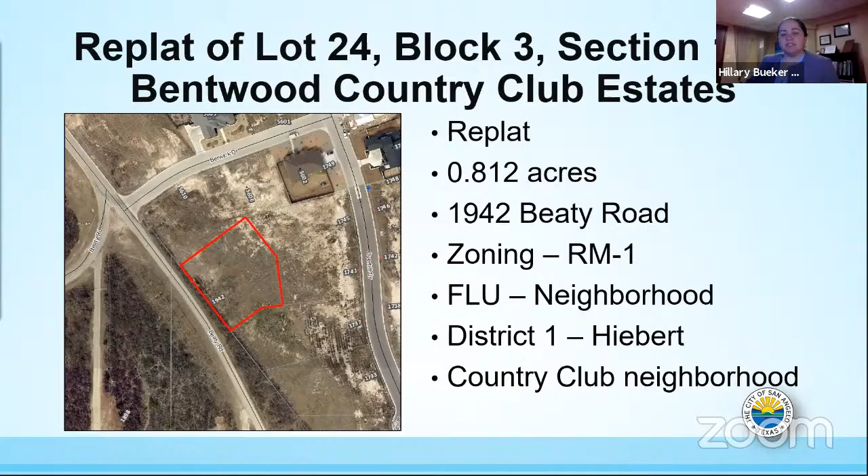So what they're doing is they're taking one existing lot that was platted in 2015 and they're splitting it up into 2. You can see the lot will remain fairly large. They're approximately 96 feet in width with 190-foot depth. So these are bigger than what would be required in RS1, but this is RM1 zoning.

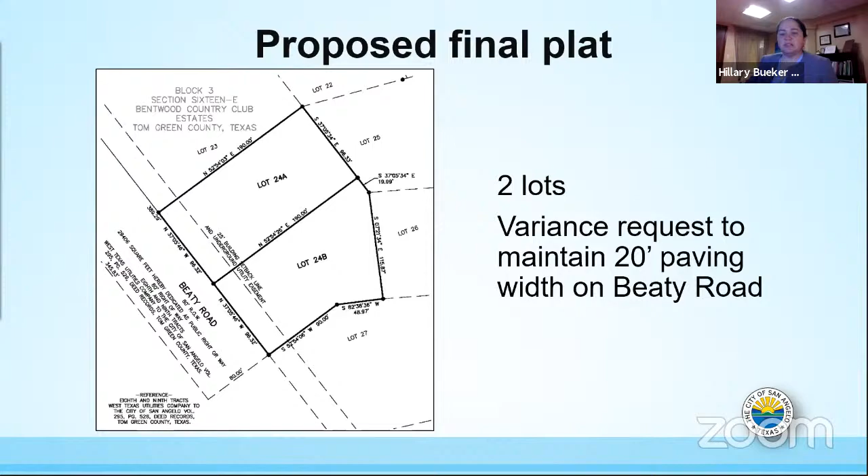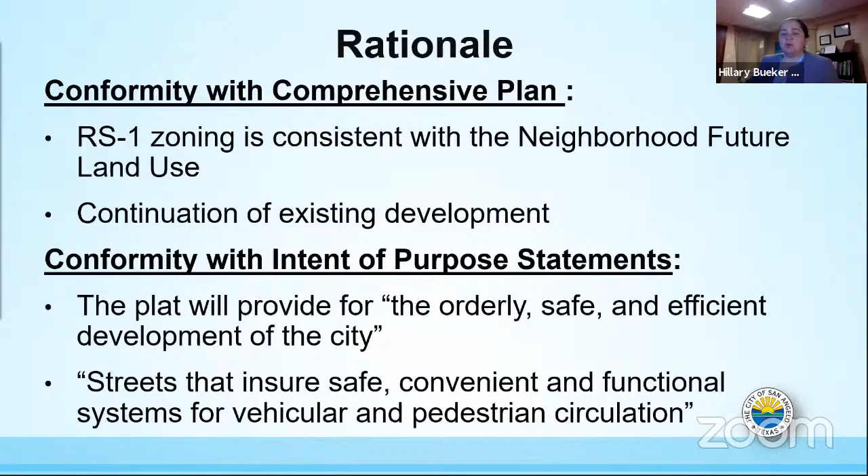So RM1 is consistent with the neighborhood future land use, and continuation of the existing development. So there's single family homes all in this area. This will provide for safe and orderly development of the city, and we will have a safe network of streets for vehicular circulation. So the one thing we do need to talk about is the Chapter 10 variance.

Beaty Road currently is just a circle at the end of this road. So this is a very limited group that will use this road. It's very rural in nature. This is getting towards the lake.

So when we looked at this street variance, we determined that it was not detrimental to leave it at its current width. Again, this is not a through street. This is not a street that the whole city uses; probably most people haven't even been in this part of Beaty Road.

So the current street meets the needs of the area, and adding 2 additional homes will not significantly increase that traffic. This street is currently on city property near a recreational area and maintains the same width adjacent to the east and the west. It is currently the same width.

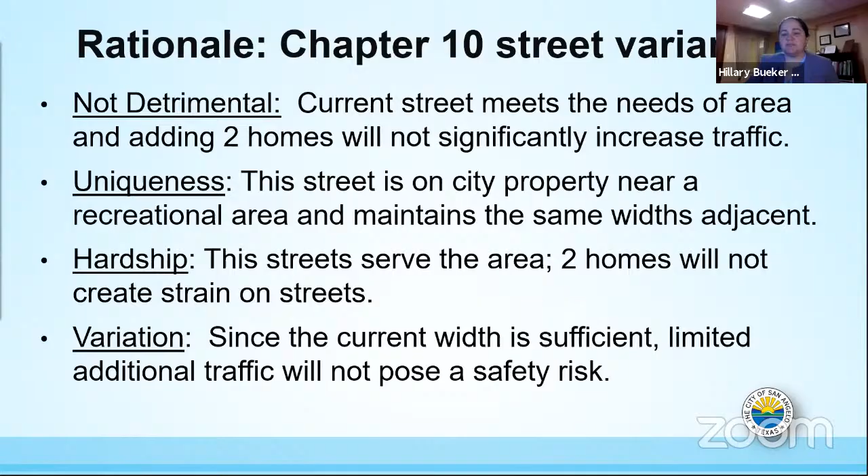The street will serve the area, and again, 2 homes will not create a strain on the street. Since the width is sufficient, this will not pose a safety risk. So this is looking at the street. You can see the Bentwood development to your left on this first picture.

The second picture is just the frontage of the lots, so it's a little hard to see what it will look like when it's done. It's pretty thick brush right along the road, but it easily can fit 2 cars passing each other. This is headed down towards the dam at Lake Nasworthy. It's a very rural and recreational area, so we believe this road is appropriate in this area.

Staff is recommending approval of a replat of Lot 24, Block 3, Section 16E, Bentwood Country Club Estates, and approval of a variance from Chapter 10-3A2 to maintain a 20-foot pavement width for Beaty Road, subject to 4 conditions. They will need a copy of their tax certification, and they will need to install water and sewer service lines to both new lots. They will illustrate an 80-foot right-of-way for Beaty Road.

The city will be joining in on this plat. The property that's adjacent is city property, so the city will be dedicating the right-of-way for Beaty Road in front of these lots. They will submit plans for Beaty Road, get a financial guarantee, or obtain this variance, as staff has recommended approval of. Does anyone have any questions?

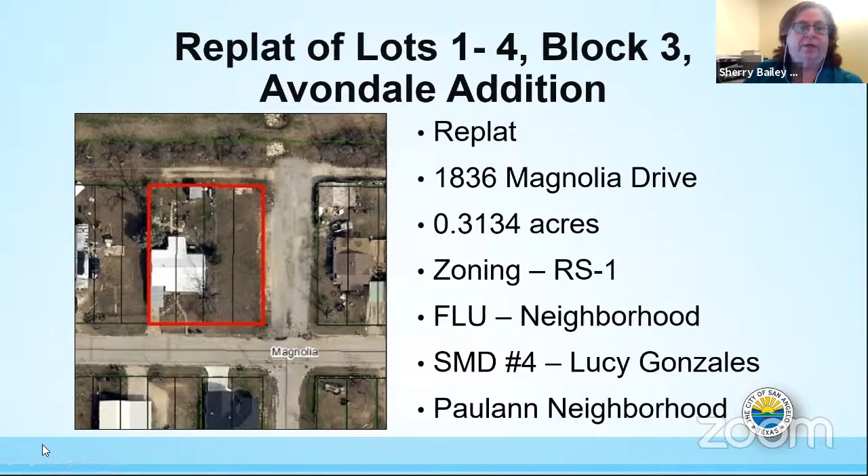As you can see, there are 2 lots, 2A and 1A. 2A is slightly larger so that it could accommodate the existing house and meet all of the setbacks. The second lot, 1A, presently does not have any structures on it.

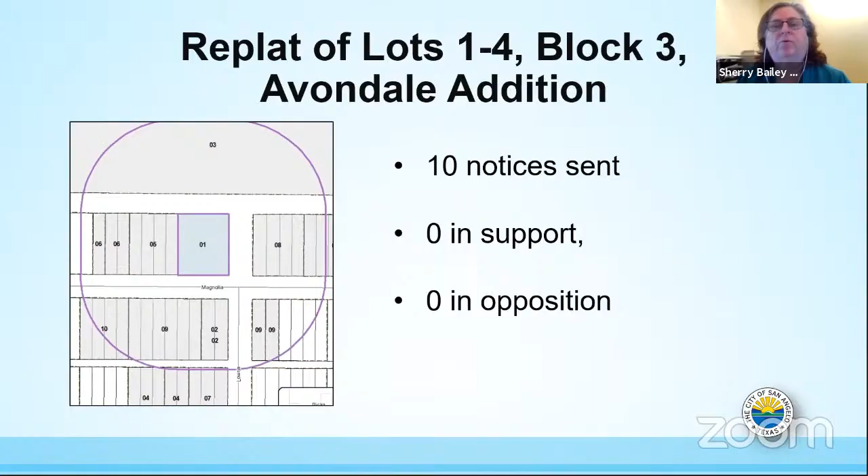The variance they are requesting is to maintain the existing 30 feet of pavement and curb and gutter along Magnolia. They are also requesting a variance to maintain the existing 36 feet of paving with no curb and gutter on Lowrie Avenue. Because this is a residential replat, we sent out 10 notices. We received 0 in support and 0 in opposition.

As you can see, this is from Magnolia Street, and there is the curb and gutter. Then if you move over to Lowrie Avenue, you can see that it is the larger 36 feet, but there is no curb and gutter, and the street has started to deteriorate around the edges.

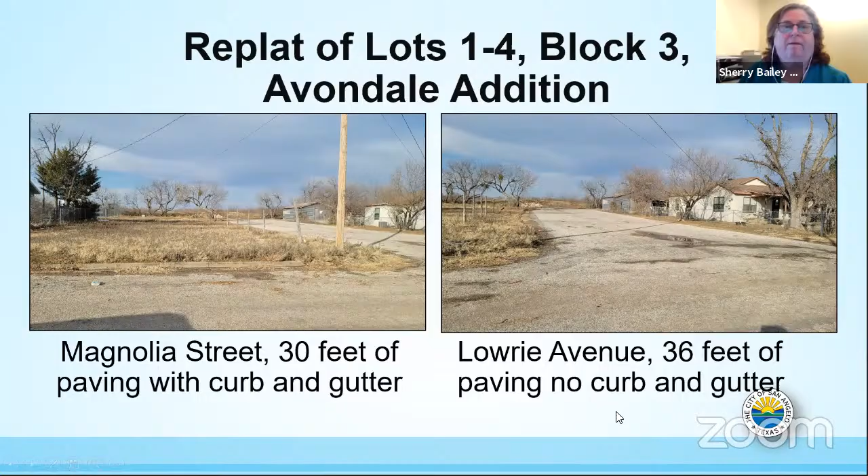This is in conformity with the comprehensive plan, since the plan has this in the neighborhood designation, and this is consistent with that. The purpose statements in this case are that the proposed plat will help provide orderly development and assist in future growth according to the city plans. It identifies boundaries and ensures easements and rights of way are provided.

Moving on to the rationale for the Chapter 10A variance request: staff is not supportive of the Lowrie Avenue variance because it is an existing road, and we agree with that, but it is only a 2-course paving that the city did a few years back. We believe it will continue to deteriorate over time, and it does not have curb and gutter, which would help that deterioration, even though the street only serves the 2 lots, the one on the corner to the west and then the one on the east.

This street really is no longer needed because it only serves those 2 lots, and the park is directly adjacent to that. There are no plans at this time to expand the street into the park. Staff believes an appropriate action would be to abandon the street and make it an alley connection. The water main service line goes through the middle, so we would maintain the 20 feet for an alley, but it doesn't make sense to continue this as a street.

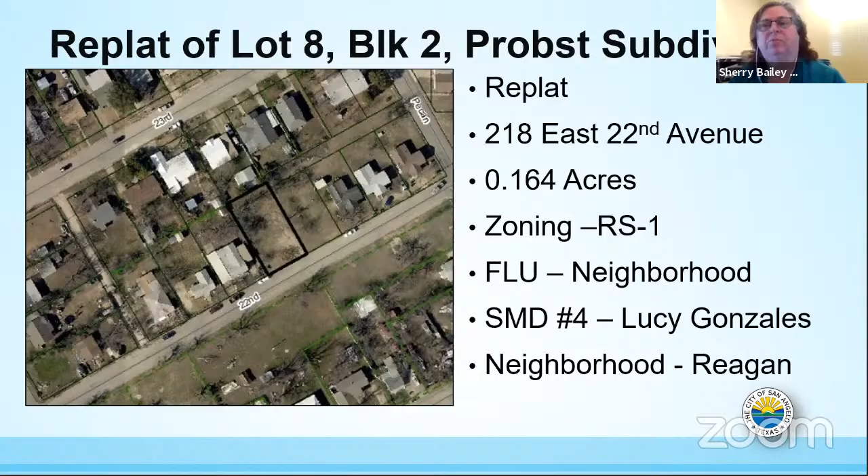Our next item on the agenda is the first replat of Lot 8, Block 2 of Probst Subdivision. A request for approval of a replat of Lot 8, Block 2, Section 2, Probst Subdivision, being 0.164 acres located at 218 East 22nd Street. Sherry Bailey, principal planner again. The piece of property we're talking about on East 22nd is actually this half of Lot 8. You can see Lot 8 originally touched both 23rd and 22nd Street. The address is 218 East 22nd Avenue. It is 0.164 acres. The zoning is RS1, single family. The future land use is neighborhood. It is also in Lucy Gonzales's single member district number 4, and the neighborhood is the Reagan neighborhood.

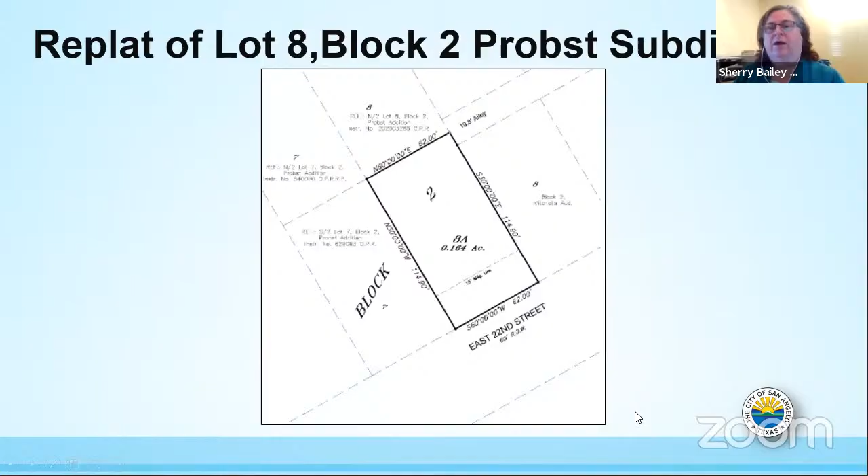This is a close-up of the proposed half lot. Even though it's never been divided off, it's always been used with a house on this property, and this piece of property left for development that just did not occur until the applicant made their request now. Because this is a residential replat, we sent out 26 notices. We received 0 in support and 0 in opposition. This will give you an idea of the area where it's located. You can see that East 22nd, when the street was built, it was built with curb and gutter, built to 30 feet of paving, but we'll talk about that in a second.

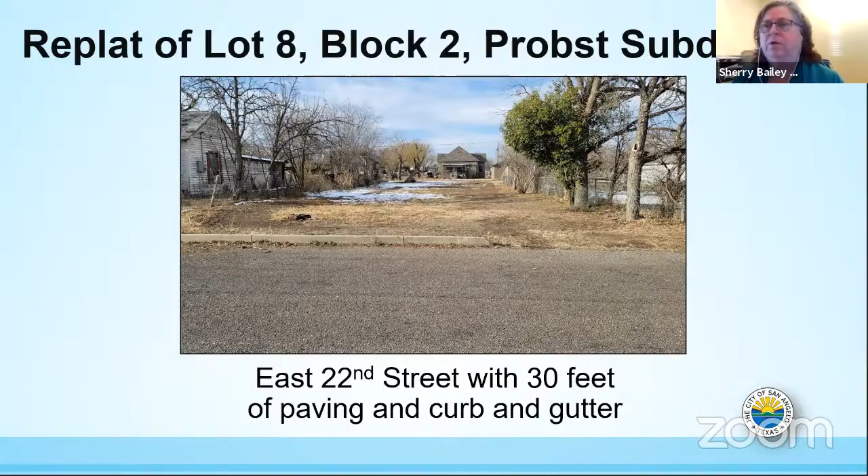It conforms with the comprehensive plan in that the comprehensive plan is neighborhood designation. Under the intent and purpose statements, the proposed plat helps to provide for the orderly development and assist in the future growth of the city. It also identifies boundaries and ensures easements and rights of way are provided.

When East 22nd Street was built, all of the required right-of-way for that street, or their incremental half, and the paving width was done on the north side of the street. I want to go back for just a minute, if I could.

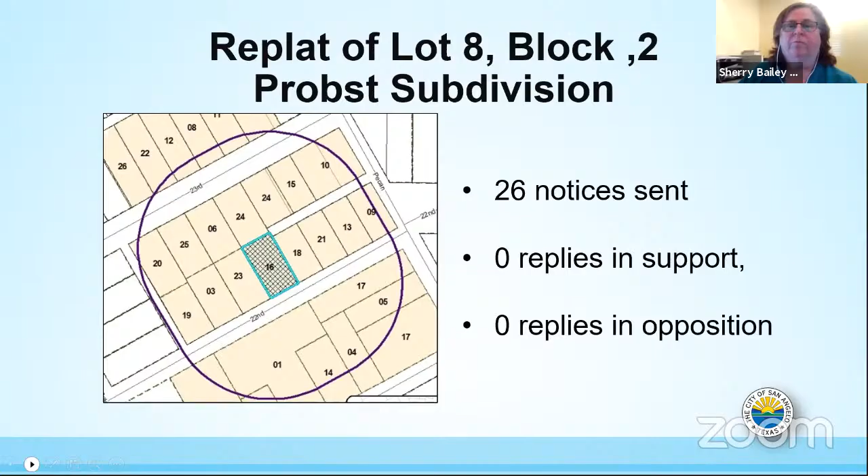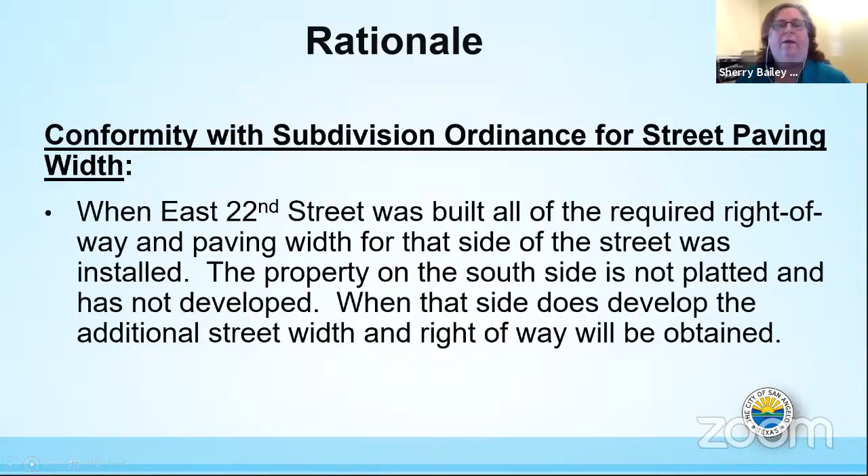You can see that the property here all along the south side is abstract. It's never been platted, and so it's never really been developed. So we've got what we need from the north side as far as right-of-way and street paving. When that south side does develop, we will look to get the increased right-of-way and the larger paving width, perhaps.

Staff is recommending approval of the plat of Lot 8, Block 2, Probst Subdivision, with 3 conditions of approval: that tax certification be provided prior to recordation, to install the necessary water and wastewater service line, and prior to plat recordation, submit revised plat or supporting documents illustrating the correct right-of-way for East 22nd Street.

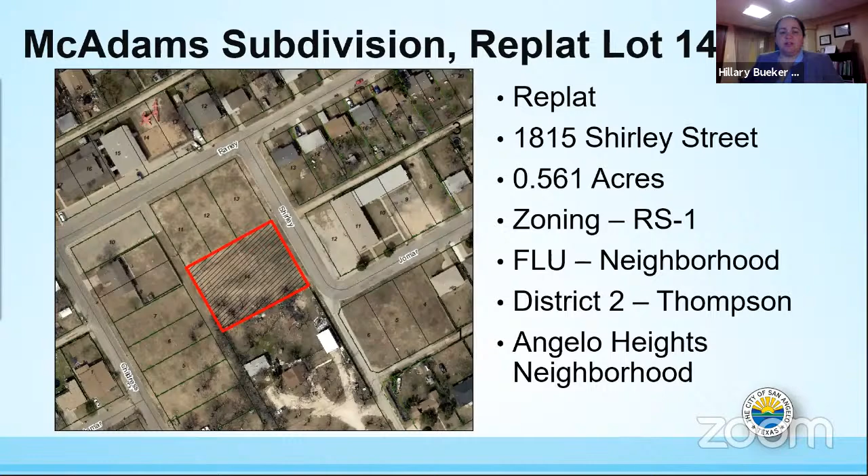If you just look around this area, you'll see a bunch of homes. The church is directly across, but there's a lot of infill in this area. So what they're looking to do is split this into 2 home lots, around 69-ish feet in width, with a 178-foot lot depth—a really good sized lot for this area. So it is 2 new residential lots.

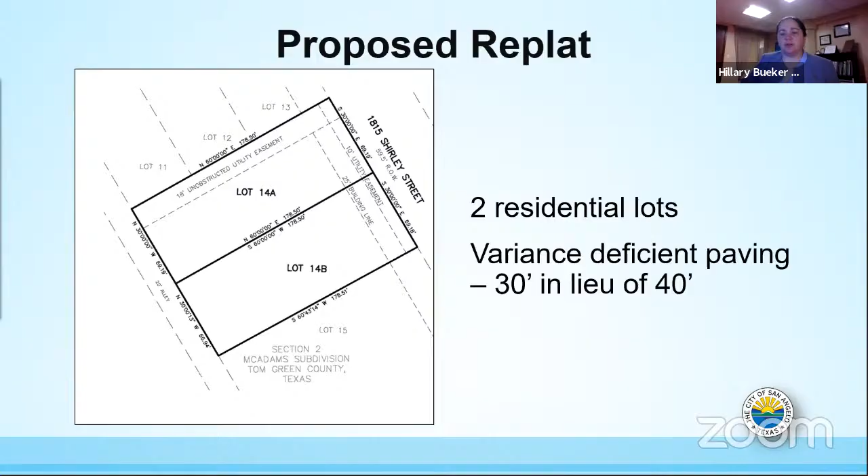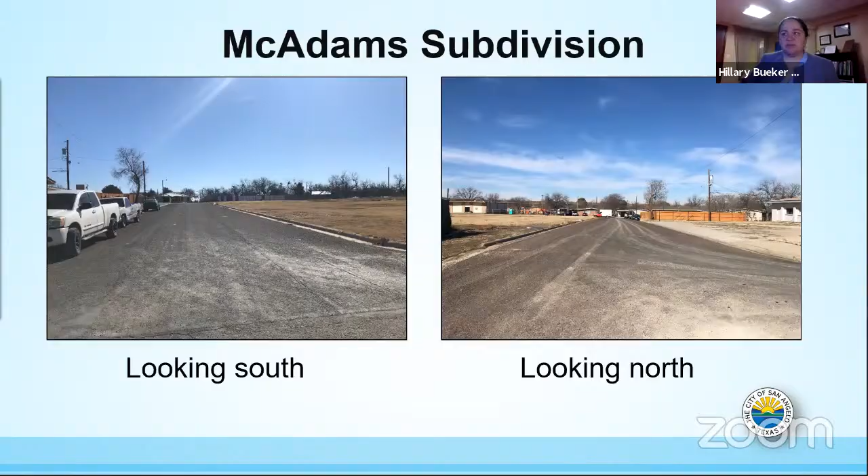So we are recommending approval of the plat. It is designated neighborhood, and this plat does conform with the comp plan. We also will provide orderly, safe development and have a street that will ensure safe and convenient functional access to this area. Again, this will not be detrimental.

Again, most of this area in this land is developed. It's a very short little street. The opposite side has been developed without improvements to this street, and again, it would be 140 feet of the 330—a very irregular jog. We don't see any physical conditions that would prevent it, but there is an existing curb, which helps the appearance and keeps it from deteriorating. And as we stated, the rest of the conditions are met.

This is the only thing they need to do. We think it's really an easy variance to support from a staff perspective. So staff recommends approval of a replat of Lot 14, Section 2 of the McAdams subdivision, and approval of a variance to maintain the 30 feet of paving with curb and gutter for Shirley Street, subject to 5 conditions.

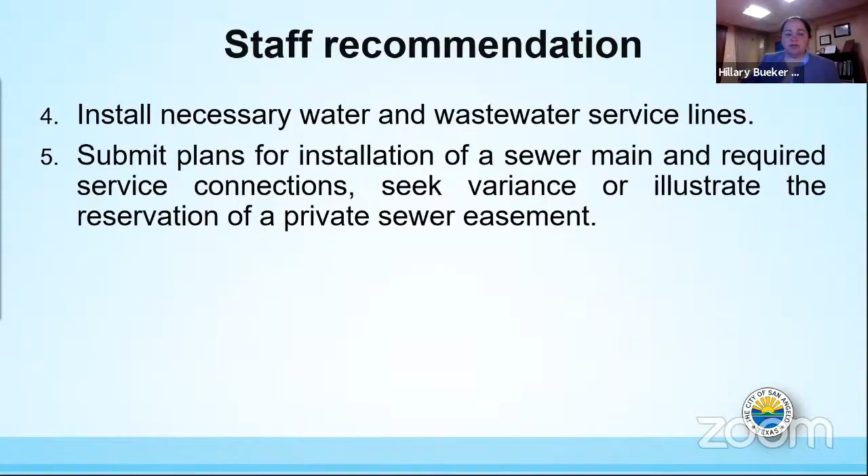Number 1, the tax certification. We need to correct the signature block on this plat, which is a fairly easy fix. They would have to improve Shirley Street or get the variance as presented. We would install the water and wastewater service lines to each lot. And then we have to do a little bit of a sewer main, or reserve a private easement, which I think is the applicant's intention. At this point, I'm going to stop sharing my screen—if anyone has any questions, I'd be glad to answer them.

Any questions for Hillary? Seeing none, we'll open it for public comment.

Erica, you're on mute. No, I'm not. Hello again. I just thank the staff for their help on this one and ask that you please approve as presented. Thank you.

Any other public comment? Seeing none, we'll close public comment and open up for discussion. I'll motion to approve as presented. Second. We have a motion and a second to approve as presented. All those in favor, raise your hand. Any opposed with the same sign? Okay, it's approved 6-0.

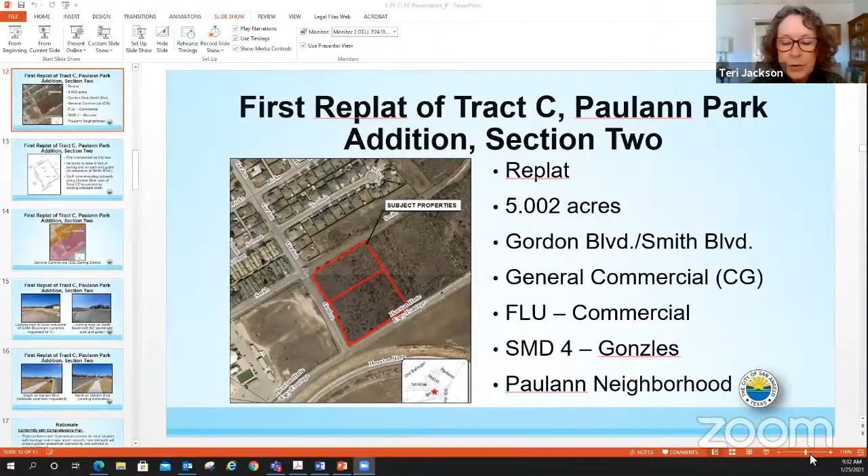Our next case is the first replat of Tract C, Paulann Park Addition, Section 2. A request for approval of a first replat of Tract C, Paulann Park Addition, Section 2, being 5.002 acres located at the northeast corner of Gordon Boulevard and East Houston Harte Expressway frontage road, and a variance from Chapter 10.3A2 of the Land Development and Subdivision Ordinance to maintain a paving width of 0 feet, no paving or curb and gutter, in lieu of the required 50-foot width with curb and gutter for Smith Boulevard and Urban Collector Street.

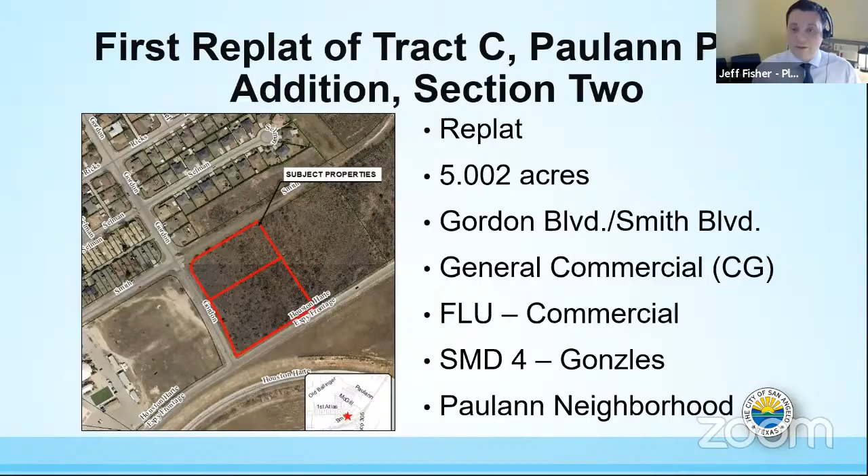Thank you, Vice Chair Jackson and Planning Commission. Jeff Fisher, Principal Planner. Our next case today is a first replat of Tract C, Paulann Park Addition, Section 2. Some of you may be familiar with this. A Dollar General went in last year; this was just over 5 acres. And now they want to sell the south lot. So it's basically one large lot, 5.002 acres, and they're going to replat into 2. The zoning is general commercial CG, future land use commercial, SMD number 4, Lucy Gonzalez in the Paulann neighborhood.

So this gives you an outline. Tract C1, Dollar General, is going to remain there. And then this next Tract C2 will be created off of the larger lot, and that'll be used for future commercial development. As part of the request, the applicant is requesting a variance from the subdivision ordinance to allow Smith Boulevard to be 0 feet, basically not to have to pave Smith Boulevard. We'll get into the variance criteria in a minute.

Staff is recommending the extension of the sidewalk down Gordon Boulevard. Dollar General, through their site plan, had already put in a sidewalk here and here. So that's a quick synopsis.

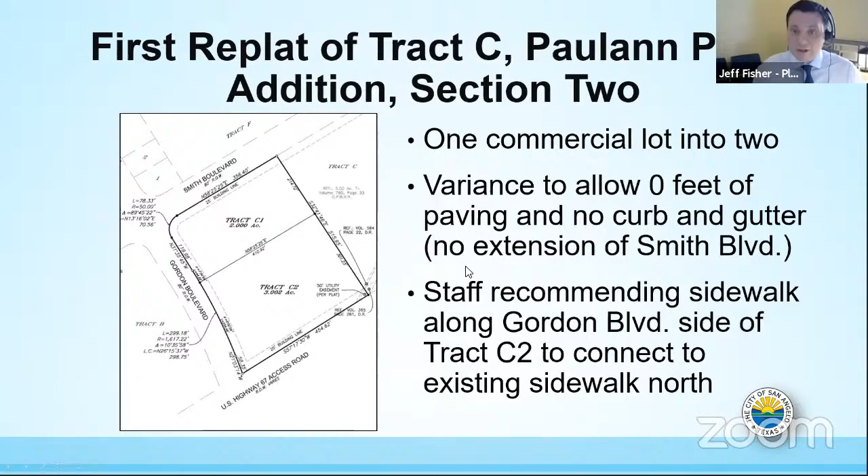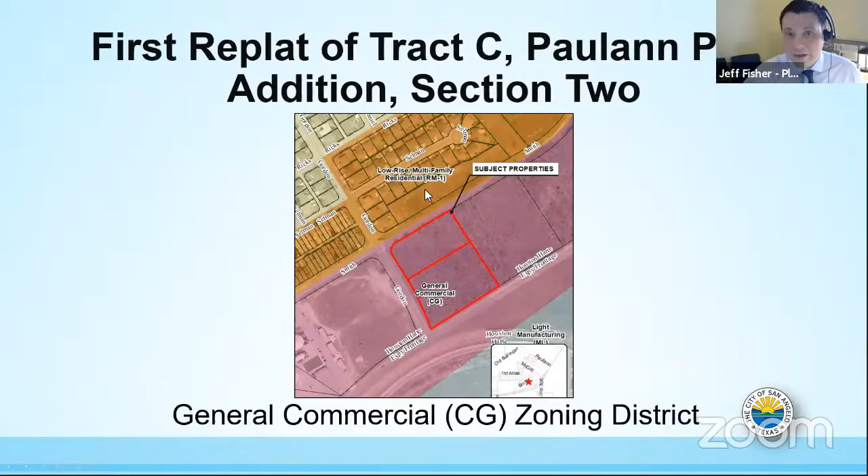Zoning, again, is general commercial CG. Pay attention to this map, we're going to go back over it in a few minutes. All of the area down here is currently vacant land, it's commercial. And then here as well, there's potential for development. This is low-rise multifamily, so that could allow single family, 2-family, or multifamily development in the future.

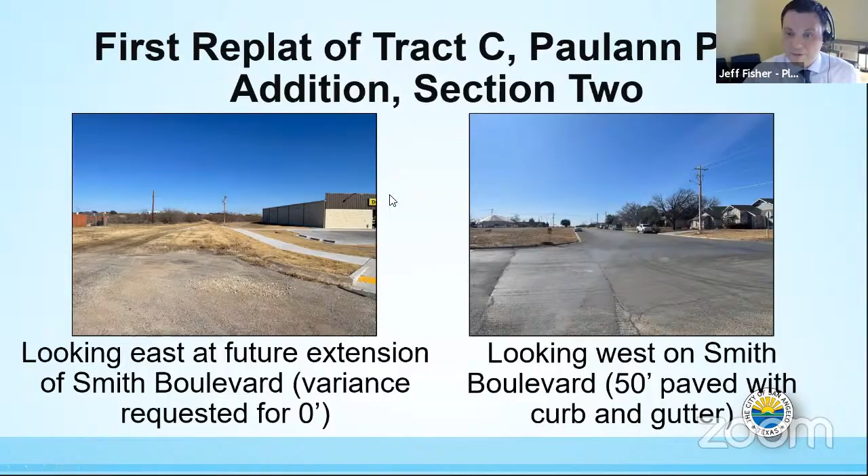In terms of the comprehensive plan and the intent and purpose statements, staff believes that it does conform just on the plat itself. The plat supports the commercial policies in that area. The zoning is CG, so that would allow future retail onto a major street network. If Smith is constructed, it would provide orderly development and assist in future growth with the city.

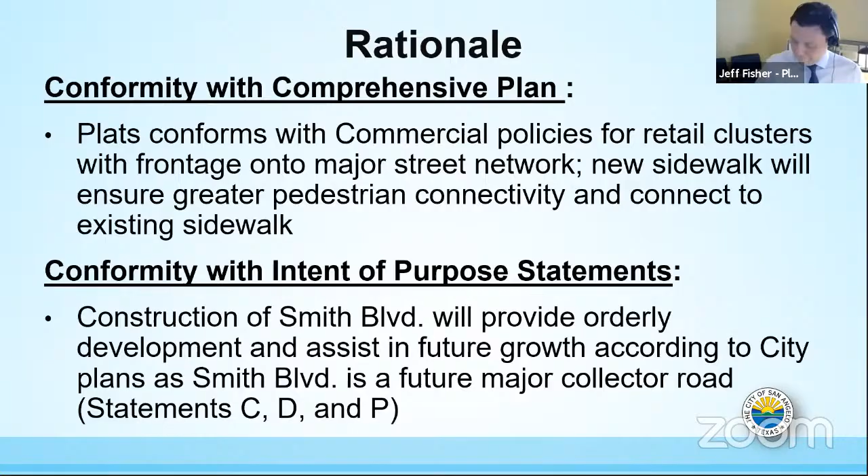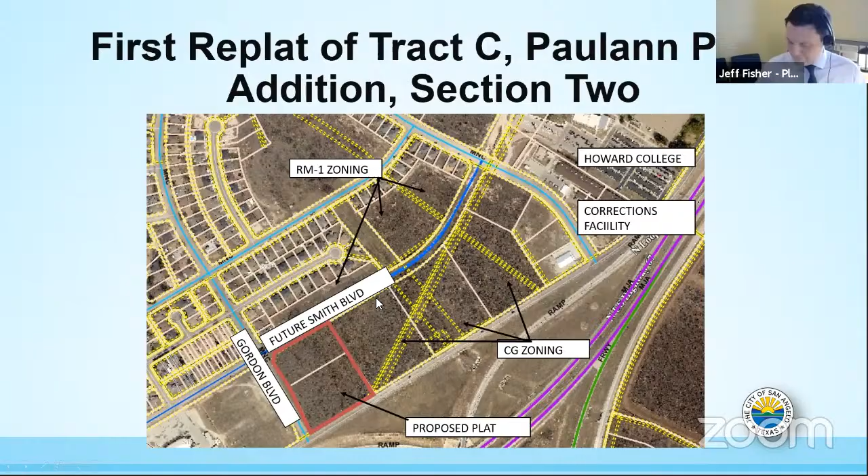So we're kind of left with a situation. If we give them the variance, we're going to have this huge gap in the street. So that's pretty much a summary of what I've stated. We believe it would be detrimental and set a negative precedent if we leave that hole in Smith Boulevard.

It's not a unique situation. Those other plats, like I say, were either platted before the current ordinance and therefore didn't have to do it, or they were left over with remainders, and we've now closed that part of the ordinance. So this is not a unique situation, and we believe that it would be prudent to get the 26 feet in this particular case.

Staff recommends approval of the first replat of Tract C, Paulann Park Addition Section 2, but denial of the variance from Chapter 10382 of the subdivision ordinance to maintain a paving width of 0 feet, no paving and curb and gutter, instead of the required 26 feet, subject to 6 conditions of approval.

So provide a copy of the tax certificate, prepare and submit plans for the required improvements to Smith Boulevard, financial guarantee or variance, submit a drainage study, submit plans and install a water main and service connections, submit plans and install a sewer main and service connections, install a water and wastewater service lines.

And then this was a fire comment. So because it's a dead end turnaround, it's only servicing no more than 2 lots. So the subdivision ordinance doesn't require it, but the fire code does prior to permitting. So this will be a note just to provide a width of a turnaround, work with the fire marshal's office.

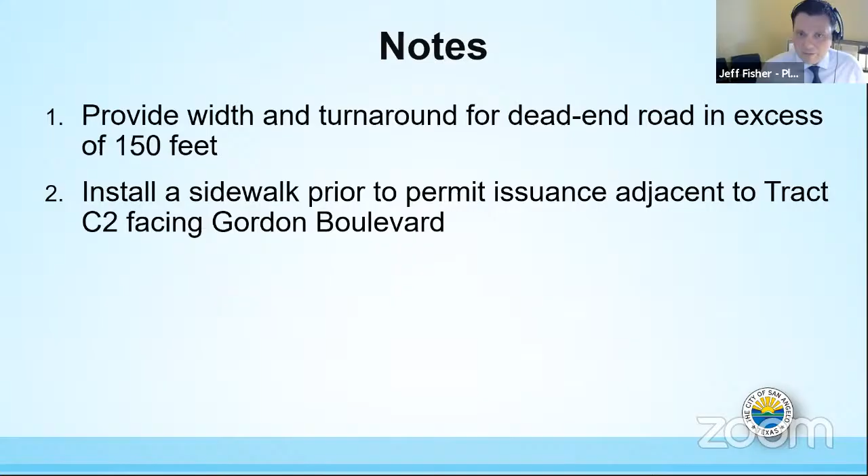And then the second comment we've discussed is the sidewalk. So this concludes staff's presentation. I will stop sharing my screen in a minute. And when probably Mr. Gully's here with SKG and city engineering, some of these conditions will probably go back through and look at some of the deferrals that were discussed. So I'm just going to stop sharing my screen now, and any questions or comments.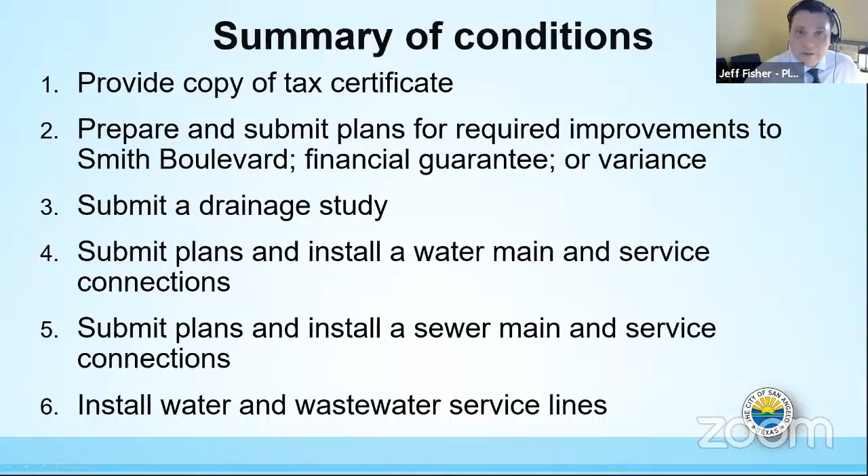Any questions for Jeff? Okay, seeing no questions, we'll open it for public comment.

Good morning, Russell with SKG Engineering. Thanks, Jeff, for your presentation. And I talked to Mr. Gatlin with engineering this morning. We're on the same page about the water and sewer utilities and potential main extensions. So really, we're not much there to discuss. We just wanted to leave it flexible enough such that we could work with engineering on whatever the solution is for sewer. There are several opportunities there. So engineering is gracious enough to work with us on the most effective solution for sewer.

And then really the main topic we'd like to speak of too is the widening, or really the paving of our incremental part of the street. As you can tell, looking at the site and even the pictures that Jeff presented, the dollar store there does not front the street that they're asking us to improve. We're creating this lot, doing the subdivision to create a lot that's really more at the corner of, has a frontage road. And so neither one of these two tracts has access, has entrances to, really relies upon that side street in any way, shape, form, or fashion.

The second one is Z 2021, West Loop 306, 1700 block—a request for approval of a rezoning from the single-family residential RS1 zoning district to the general commercial CG zoning district, being 9.182 acres out of Casper Berberich Survey 177, abstract number 52, lots 1, 2, and tract A, Lucky Lou Addition, located south of Loop 306, west of Old Stone Drive, and east of North Bentwood Drive.

I think the Planning Commission is very familiar with this piece of property. We recently told you that this triangle piece was being annexed into the city, and last month you had the plat for this piece of property. They are now moving forward with a comp plan amendment to transitional for the piece being annexed into the city. This piece of property, as I'll show you in a minute, is already transitional.

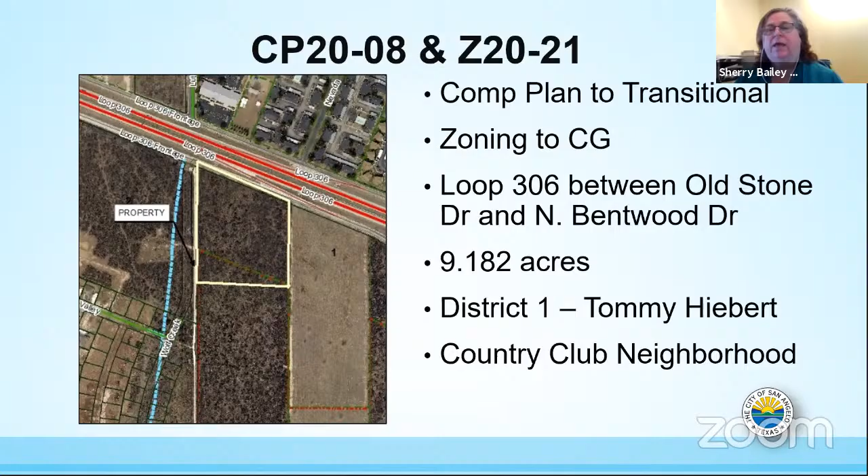And then they're requesting to rezone the entire area to general commercial. As you indicated, it's just off of the Loop 306 frontage road. Their total area is 9.182 acres. It's in District 1, Mr. Hiebert's district, and it's the Country Club neighborhood.

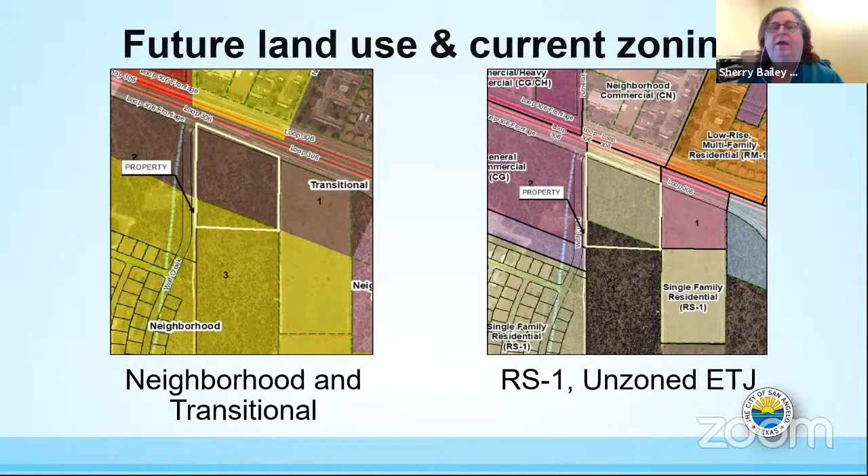This is the piece of property that we currently want to change the comprehensive plan on from neighborhood to transitional. As you can see, this whole piece already in the city limits is zoned RS1, and we're wanting to rezone the entire piece to general commercial. Bringing it at this point in time will sync up the annexation as it goes to city council for action with the rezoning, so that by the second hearing for both of those items, they will be annexed into the city and zoned at the same time.

There were 4 notices sent out. We have not received any in favor or any in opposition. The newly annexed area is intended to square off this area for commercial development. And because this is transitional, that's actually a really good comprehensive plan designation, because it buffers the area between Loop 306 and what we anticipate will be residential when they annex it to the south.

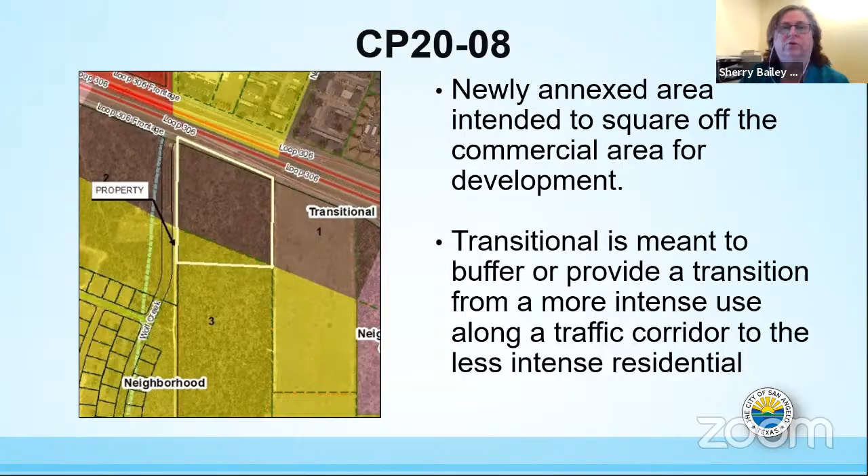And that transitional is exactly what it indicates - a transition from a more intense use to a less intense use, the residential use. So the rationale behind the zoning is that it's compatible with, if you approve the comprehensive plan amendment, the comp plan indication for a commercial area adjacent to 306 acting as a buffer to the residential. It's also consistent with the zoning ordinance.

If you look all around the city, you'll see a number of areas where a very intense use or a major traffic carrier is located, and general commercial is immediately adjacent to it, acting again as a buffer to the residential. It's compatible with the surrounding area. Old Stone, immediately to the east, is also zoned general commercial along the interstate. And the property to the west is low-rise multifamily, which is also considered a fairly high intensive use.

This area is beginning to develop, and with the sewer expansion capability project, we see that the area is going to take off, and we expect additional annexations and rezoning requests in the near future. We believe the effect on the natural environment will be minimal because it was always intended to be commercial use along that Loop 306, so most of the effect to the natural environment has already occurred.

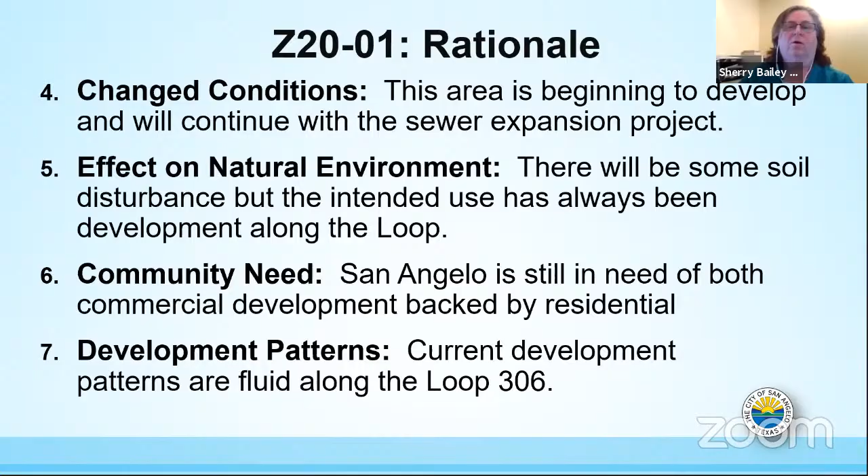As far as community need, San Angelo is still in need of both commercial development backed by residential, which provides a nice balance all around the city. The current development pattern is dictated by Loop 306 - you're very familiar with that. It carries most of the traffic from that south residential area into the community and other areas. So this general commercial is a really good mix along with the residential that we anticipate.

Staff is recommending approval of the request for the comprehensive plan for the 1.658 acres to transitional, and we're also recommending a rezoning for the entire area, the 9.182 acres, to general commercial. That just makes sense - it's immediately adjacent to the frontage road for 306, and it's consistent with what has occurred in the area. And with that, I'll stop sharing my screen. Are there any questions?

Okay, no questions for Ms. Bailey. We'll open it up for public comment. Seeing no public comment, we will open it for discussion.

I actually do have a question for either Sherry or Hillary. On this, we did it as one, we read it all together - do we need two separate motions on these since they are totally different items? No, ma'am, as long as the motion covers both items, we should be able to take one vote. Okay, great. Thank you.

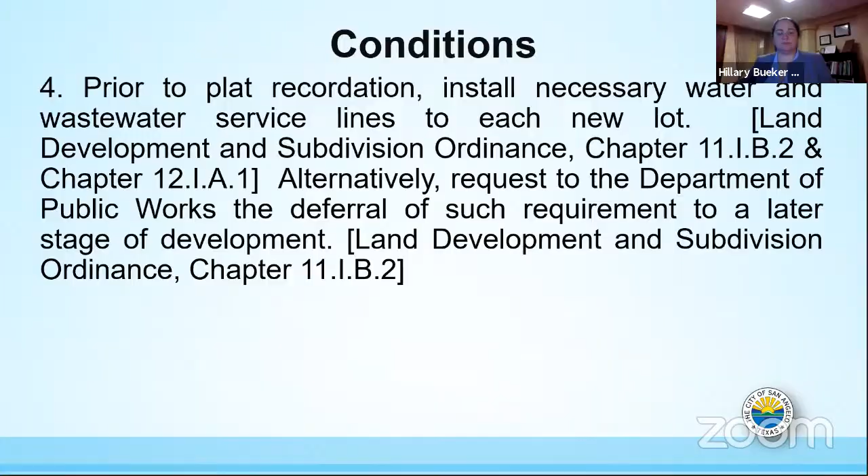So we are looking at Z 2022. This is 2 North Koenigheim Street and the surrounding properties. We are rezoning from 4 different districts: CGCH, general commercial heavy commercial; CN, neighborhood commercial; RM1, low-rise multifamily; and CG, general commercial, all to CBD. When we pull up the zoning map here in a minute, you'll see that the CBD is directly adjacent to this.

The applicant for this request is Jack's Convenience Store. They own the adjacent property, which is their lube center. There is a law office in this area, and the rest is the Tom Green County Sheriff's Office and yard. Jack's was the applicant, so both of their properties are included. We've spoken with Tom Green County and they have agreed to be part of this. We have not directly spoken to the law office, but we sent them a certified letter, and they've received their notification.

So we've sent out 2 letters and have heard no opposition. Again, 2 North Koenigheim and most of the adjoining block, we're looking at a little over 3 acres. This is SMD number 3, Harry Thomas's district, in the downtown neighborhood.

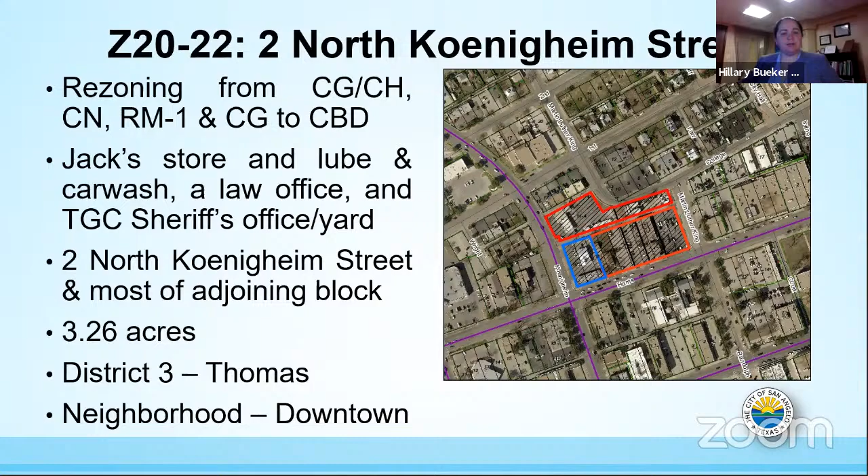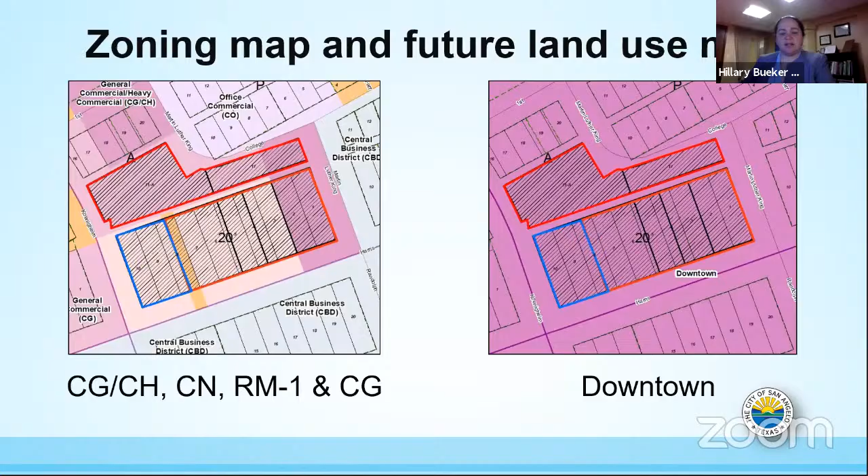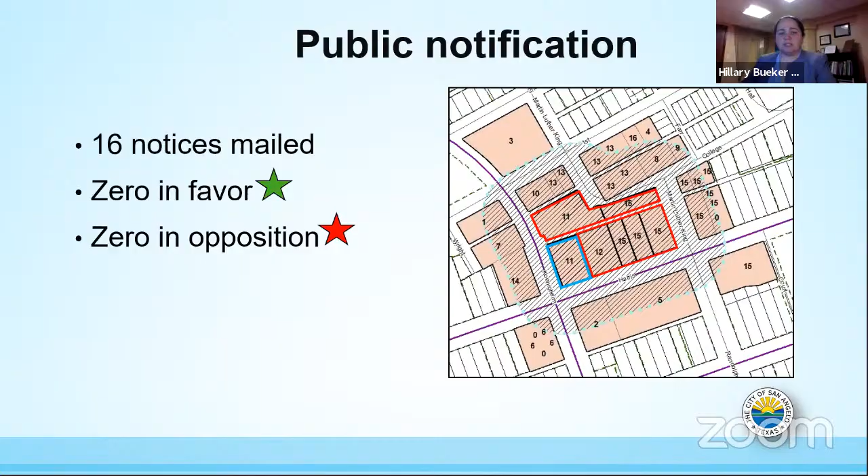So we mailed out 16 notifications. We've heard 0 in favor and 0 in opposition. We believe this is compatible. Again, the future land use calls for this area to be downtown. We want to reinforce the downtown as a commercial service center, which most of these uses would fall in.

This will allow for a greater variety of uses, and it will allow the commercial uses to expand at their current locations. Again, we have a higher allowance of freestanding signs. This was originally initiated by the applicant because they are looking to install a 40-foot sign, and the current CN zoning did not allow it. So this will allow up to 40-foot signage.

Again, it's compatible with all the surrounding properties. The area is mostly comprised of mixed uses, but this specifically is commercial. This would allow some residential and allow for mixed use. We have talked about rezoning most of these properties on and off for a while, so this will be compatible with the conditions as they've changed over time.

And the CBD standards really allow the flexibility for these properties in freestanding signs, in setbacks, in parking issues. We see little to no adverse impacts on the development. These sites are mostly developed as they stand today. And again, allowing CBD to expand will expand the development opportunities in this area. This is mostly mixed commercial. There are some residentials around this area, but the subject properties are strictly commercial.

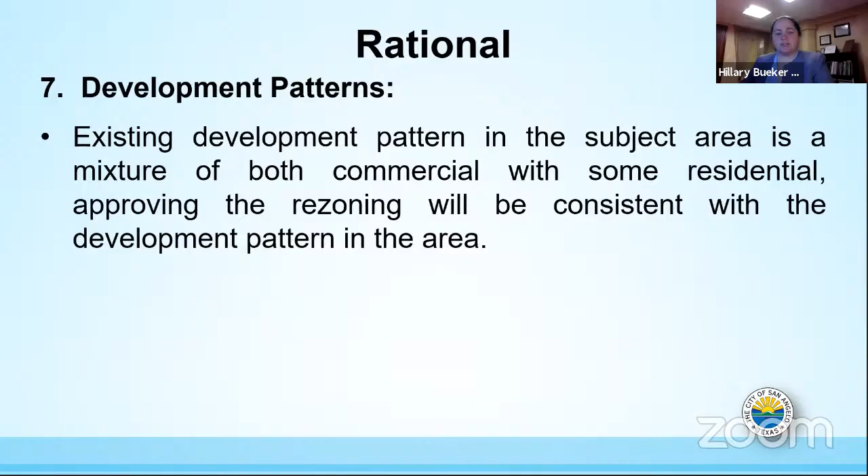So staff is recommending approval of the rezoning from the neighborhood commercial, general commercial, heavy commercial, and low-rise multifamily to the central business district, being 0.5 acres located at 2 North Koenigheim and 2.72 acres west of Martin Luther King, north of West Harris, and south of West College Avenue. Does anyone have any questions?

Okay, no questions for Ms. Hillary. We will open it up for public comment.

Seeing no public comment, we will open it up to the commission for discussion. Make a motion to approve.

Second. Okay, we have a motion and a second. All those in favor, raise your hand. Okay, any opposed?

Brittany, you're voting for, is that correct? You're muted, Brittany. Yeah, I'm sorry, I'm voting to approve. I apologize, I lost my connection. Okay, that's okay, thank you. I just wanted to confirm.

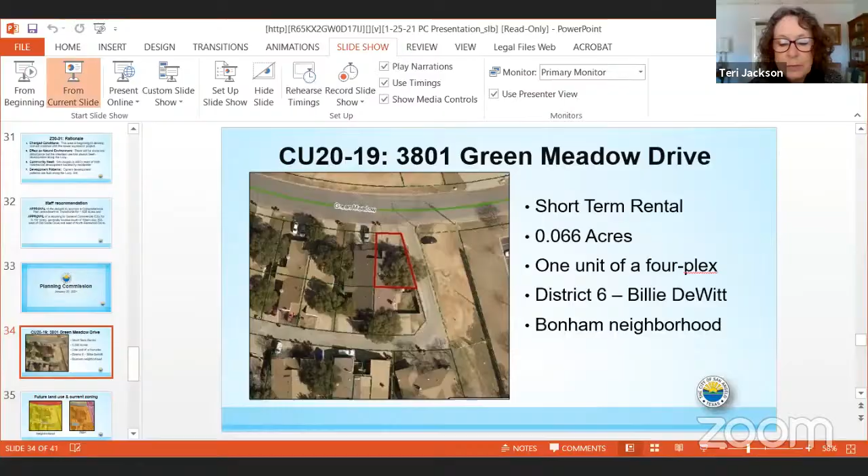CU 20-19, 3801 Green Meadow Drive, a request for approval of a conditional use for a short-term rental within an existing residential structure in the low-rise multifamily RM1 zoning district for a property located at 3801 Green Meadow Drive.

Thank you, Vice Chair. This is a request for a short-term rental, and as you're well aware, short-term rental takes a conditional use action. In this particular case, it is a fourplex. Each portion of the fourplex is individually owned.

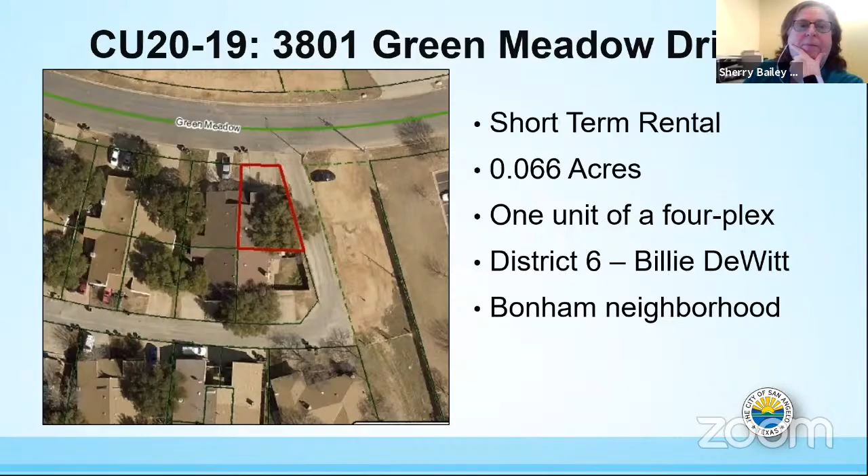So it's not a multifamily in the traditional sense, but it is individually owned. It is 0.066 acres, in District 6, Billie DeWitt's district, and it's the Bonham neighborhood. The future land use is neighborhood, it is consistent with that, and the zoning is RM1.

There were 22 notices mailed out very late on Friday afternoon. We did receive 2 letters of opposition. Both had the same concerns. The entire area out there is RM1, and there are a lot of individual units that were purchased and are now being rented out, so it is a very intense residential use, with a lot of cars out there.

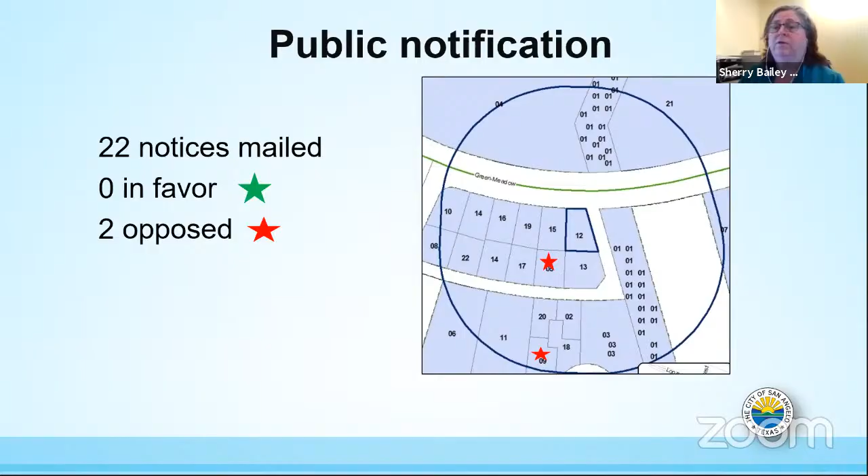The rationale for supporting the conditional use in this case is because the impacts are minimal on that corner piece of property. The parking is provided, the fencing is provided, all of the requirements under the short-term rental ordinance are there. It is consistent with the RM zoning, and the short-term rental does fit in as a conditional use under that zoning. It is compatible with the surrounding area because all of the development in that area is fourplexes, and it's more intensely developed as a residential area.

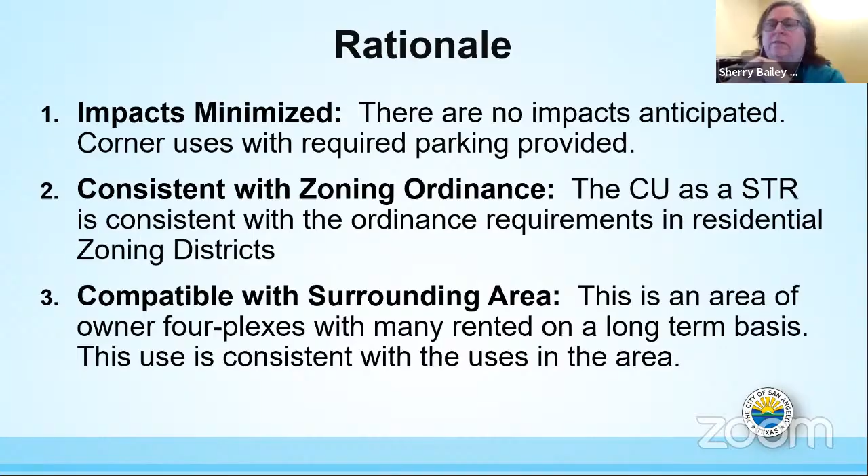We do not anticipate any effects on the natural environment. As for community need, short-term rentals are very similar to housing, but on a very, very short-term basis. We get a lot of demand within the city for people coming in to the base who are going to be here for 2 weeks or so, looking for someplace they can rent. They don't want to go into an apartment situation, and most places can't, so there really is a large call for that.

In visiting with some of the people in the area, we know that some of the businesses out there have people coming in. This request involves no changes to the existing development pattern because it's already an established use, and it's not impacting that use from a staff standpoint.

Staff is recommending approval of the conditional use for the short-term rental at 3801 Green Meadow Drive with 2 conditions of approval: that there's no exterior evidence of the short-term rental status, and that the property owner shall maintain the short-term rental operation consistent with section 406 of the zoning ordinance, adhering to all requirements. In visiting with the applicant, they have a couple of other short-term rentals and are very aware that if they don't maintain it or follow the requirements, staff will know about it very quickly.

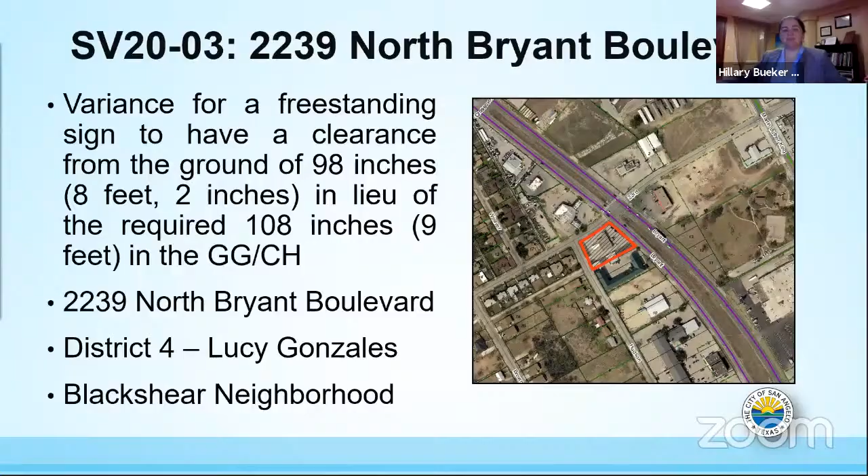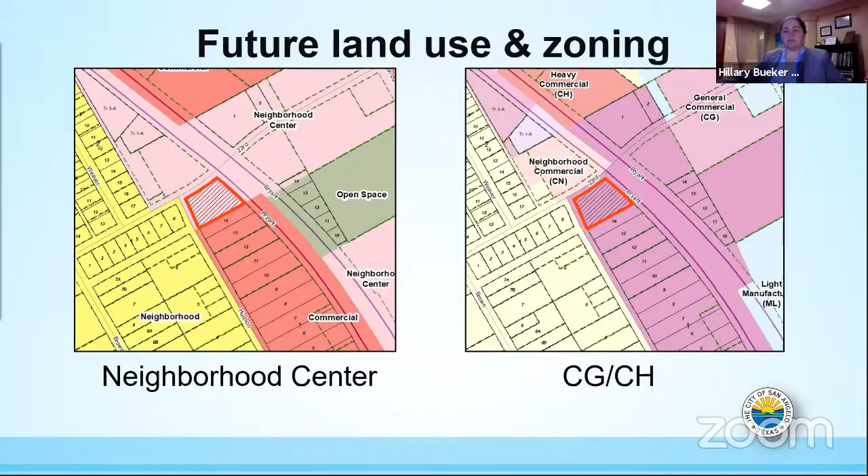Okay, here we go, Planning Commission, I've got the last 2. This is a sign variance - Terry just mentioned they are requesting a variance. They are going to be at 8 feet 2 inches instead of the required 9 feet. They are located at 2239 North Bryant in SMD number 4, Lucy Gonzales's neighborhood district, in the Blackshear neighborhood. So the current zoning is general commercial, heavy commercial, but the future land use speaks to a neighborhood center kind of feel, so we want to keep it relatively low scale if we can.

This is the proposed sign. You can see the existing sign, the Concho Educator sign - the 2 poles exist today. They have a digital sign that they moved from a different location and would like to place underneath the existing sign, which gives them that clearance that doesn't meet the 9 foot standard. The drawing to the right illustrates where the sign is located - it's interior to their lot. A lot of the 9 feet requirement is to allow visibility of pedestrians and vehicles. Since this sign is so close to the building, I don't think visibility is as much an issue as it would have been had this sign been located along the right of way.

So they have actually installed it. We have talked to them - it needs to go to Planning Commission. You guys can make a decision, and then they might have to remove it or move it up depending on your final decision. But you can see there, even a car parked beside it - the truck has a little bit of visibility issues, but the SUV can see underneath it. So that's really what we're speaking to. If your variance is granted, we would require them to push it up all the way so it touches the other sign, giving the maximum amount of clearance under the sign.

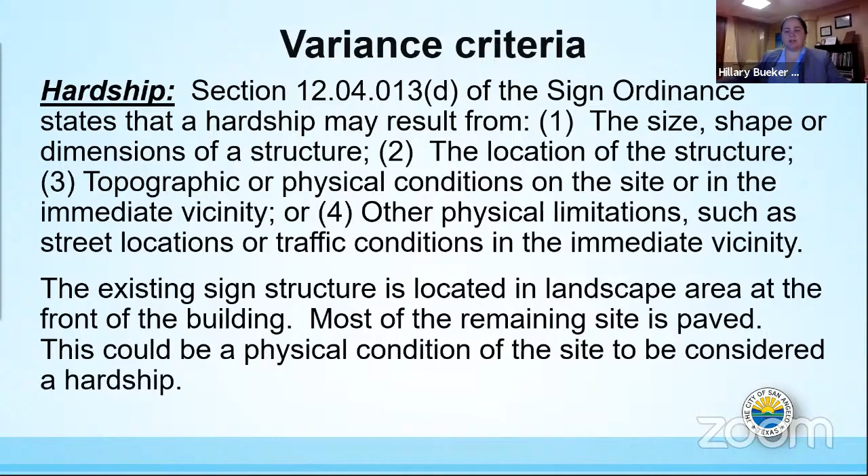So again, a hardship is required for a variance. The existing sign structure is located in a landscape area in front of the building; most of the remaining site is paved. So this physical condition might be considered a hardship - that's really for the board to decide. If they had to move it somewhere, that might be a pretty big deal trying to find a location given the parking lot exists today. So staff is recommending approval of this variance. The proposed sign will not impede traffic patterns or safety. The existing sign has been located in front of the building for years, and the digital sign will just be an addition to this existing sign.

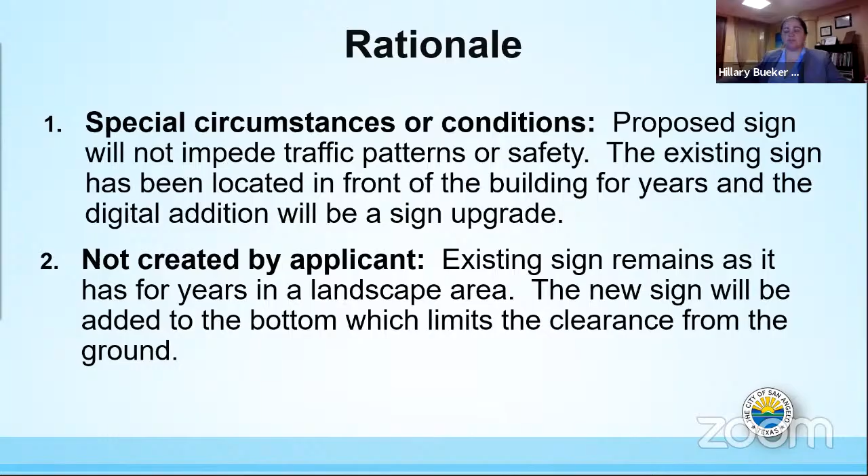Putting the new sign at the bottom will limit the clearance, but we believe 8 feet 2 inches will serve since it is in a location very close to the building as it sits today. The sign ordinance set the 9 feet requirement so that there would be no major impacts to traffic, given its interior location on the property and the fact that it's set back 63 feet from the street curb.

Staff doesn't foresee any traffic or safety concerns at this point. With the approved variance, the sign will meet all other provisions of the sign ordinance. Since this is mostly for vehicle visibility, we think the sign's location should not cause these issues. The proposed sign will not depart from the ordinance other than the ground clearance requirement, so if we leave it in the same spot, this will just be an extension of the existing sign.

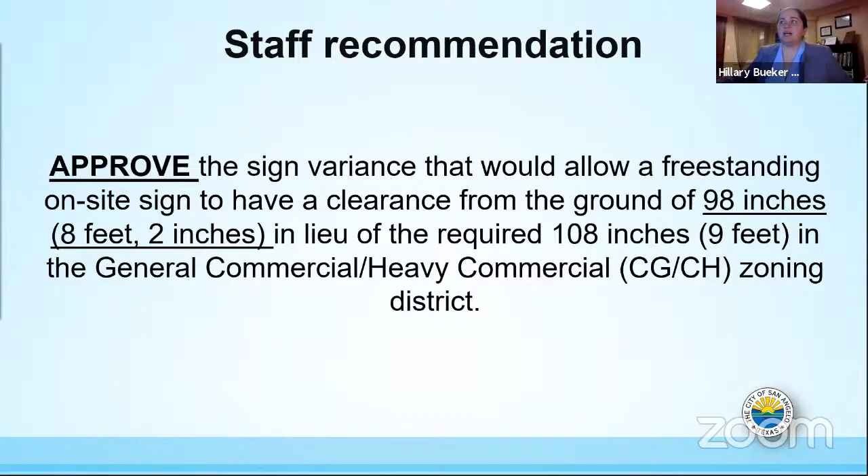Staff is recommending approval of the sign variance that would allow a freestanding sign to have a clearance of 98 inches, 8 feet 2 inches, in lieu of the required 108 inches, 9 feet, in the general commercial, heavy commercial zoning district. If this sign had been anywhere near the street or we foresaw other issues, I think we would have changed our recommendation. But given the fact that it is right next to the building, in the existing parking lot, we don't see any issues with this. So we are recommending approval.

Hillary, to achieve the 98 inches, you're saying that those two signs have to be touching, that has to be raised up? Yes ma'am, we wouldn't support it. We told the applicant we were not willing to support it if they didn't get the maximum they could, so they are willing to bump it up.

Great, thank you. Any other questions for Hillary? Okay, seeing none, we'll open it for public comment. Anyone wishing to speak on this case? Seeing no one, we'll open it for discussion with the commissioner.

Motion to approve as presented. Second. Okay, we have a motion and a second to approve as presented. All those in favor, raise your hand. Any opposed with a like sign? I believe that's 6-0, is that right? Yes ma'am, approval. Okay, thank you.

Our next case is a street name change. City Council has final authority for approval of street name changes. Tractor Trail and Roy Robb Drive street naming. A request to name private streets Tractor Trail and Roy Robb Drive over the complete length from North US Highway 67, 0.25 miles southeast and then 0.15 miles northeast, located in Northeast San Angelo near the Tom Green County Detention Center.

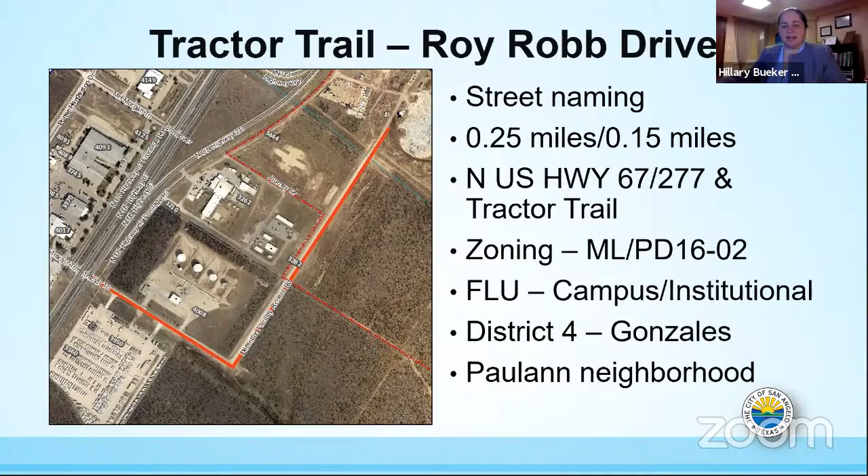Again, these roads begin at North US Highway 67 and Tractor Trail, so this will be an extension of that. The zoning is currently ML and PD 1602. The future land use of this area is campus institutional. This is in SMD number 4, Lucy Gonzales's district, in the Paulann neighborhood. Again, these are private streets on property wholly owned by COSA and Tom Green County. We are assigning these names to help with emergency service calls, so that they'll be able to get there quicker.

Tom Green County uses the streets to access the detention facility, and they have, in another agreement, agreed to maintain the roads until the point at which they become city standards and have right-of-way dedicated. So it's basically just naming them. They have named their portion Detention Facility Access Road, so this action will rename the portions on the COSA property and officially name the pieces that have not been named.

Changing the name will help clarify the use for emergency personnel, residents, and visitors. There's no existing streets in the city with the same name, and changing the name will clarify the use of the road. So staff is recommending approval of the proposed street naming designations of Tractor Trail and Roy Robb Drive. I will stop sharing my screen if anyone has any questions.

Okay, any questions? Seeing none, we'll open it for public comment. No public comment, we'll open it to the commissioners for discussion.

Motion to approve as presented. Second. Okay, we have a motion and a second to approve as presented. All those in favor, raise your hand. Any opposed with same sign? I think that was 6-0, Hillary, is that right?